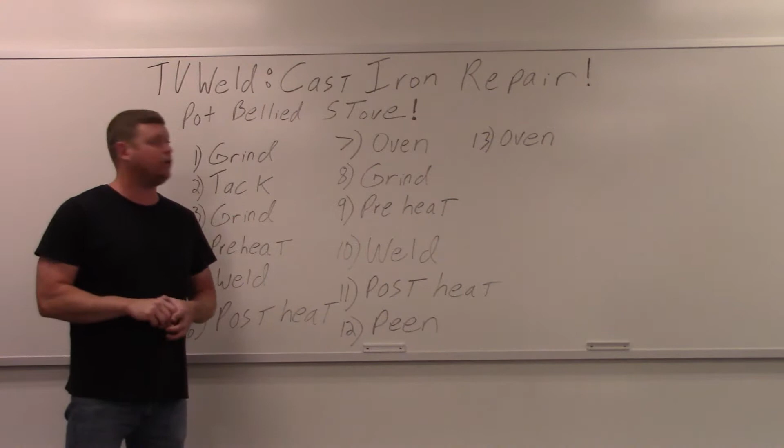One of the legs that hold up the stove is broke, so we're gonna do a cast iron repair on that. Before the steps we're gonna take, first I'd just like to say that we're gonna use a nickel rod. You always use a nickel rod when you weld cast iron. It's 99% nickel, the stuff we're using. And I'll get a shot of the box before we actually start doing the repair so you can see exactly what we're using.

This is the procedure that we're going to do. Now when you're doing cast iron, it gets chaotic when it starts because you can't stop, or else you can potentially crack the weld or crack on the toe of the weld if it cools too quickly. So I'm going to kind of outlay this right here. The steps: we're going to grind, tack, grind the other side, preheat, weld, post heat, then we're going to put it in an oven and let the entire part get to 250 degrees. If you don't have an oven, you can bury it in sand. That's a common technique used to slowly cool the material.

Then we're going to grind again, preheat again, weld again, post heat again, and then peen it till it's getting down to around, I don't know, 300, 250 degrees ish. And then we're going to pop it back in the oven overnight and just let it slow cool, all right?

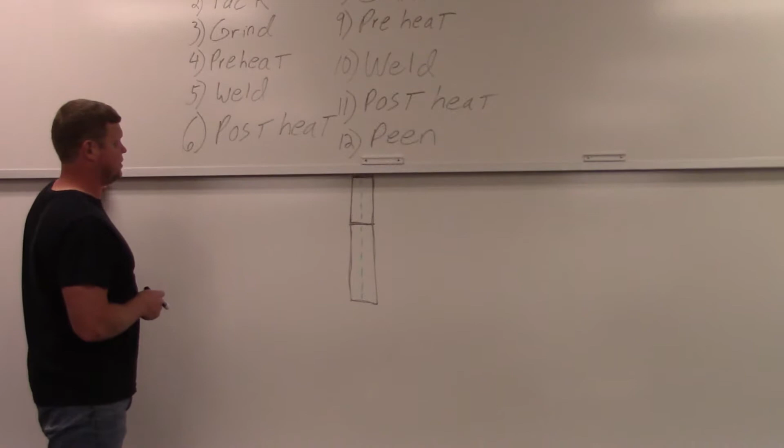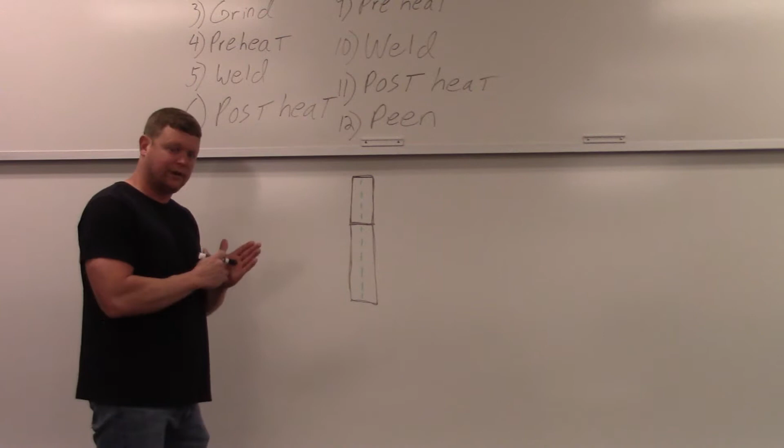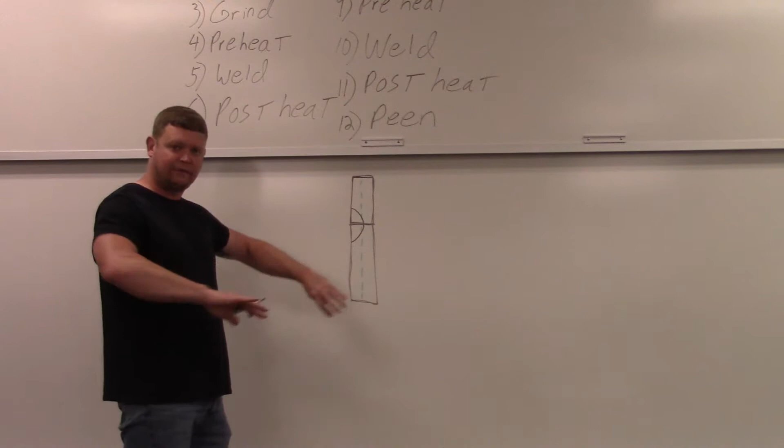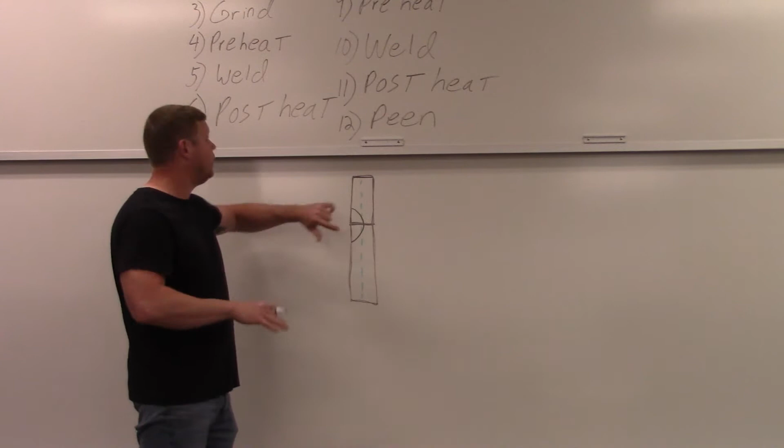After the second grind, we're going to preheat away from the actual weld zone so that the heat can travel through real nice and it's not localized heating, because that'll cause your cracking. Then we're going to weld this. Then we're going to post heat, again letting that heat get all through the whole part. We throw it in the oven, and then we're going to come back and grind again, like I said, more than 50% on this side.

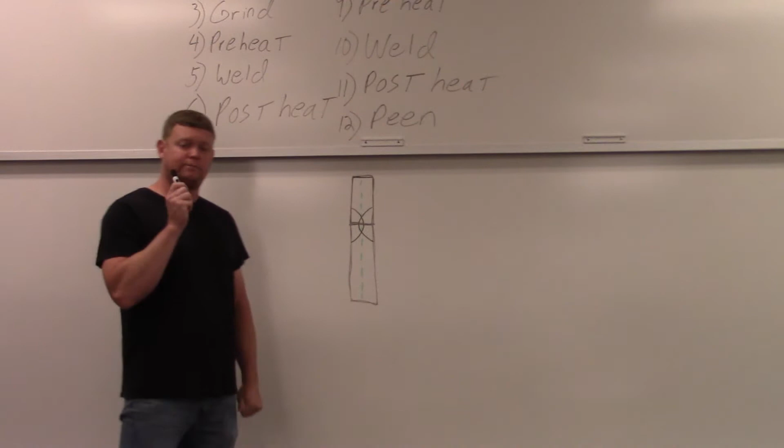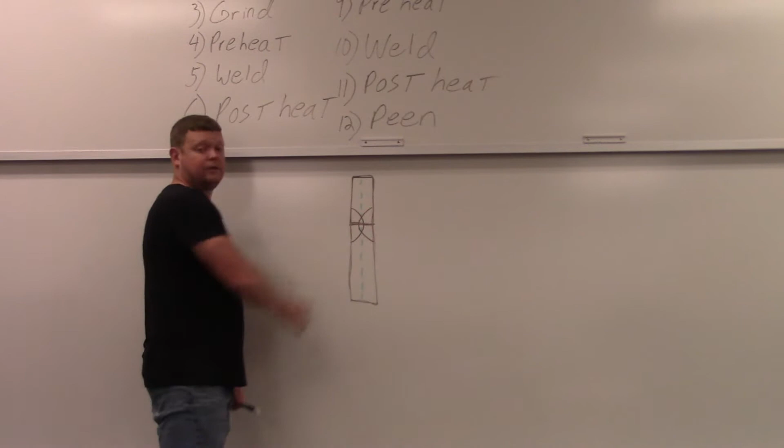So after we grind, we're going to preheat again. We're going to weld it, post heat, peen. So we're going to sit there with a ball peen hammer and just repeatedly hit it. It stress relieves the actual part. And then we're going to put it in the oven overnight. So basically you want the weld to go all the way through this part. That's the goal at the end of the day. So hopefully that'll make sense.

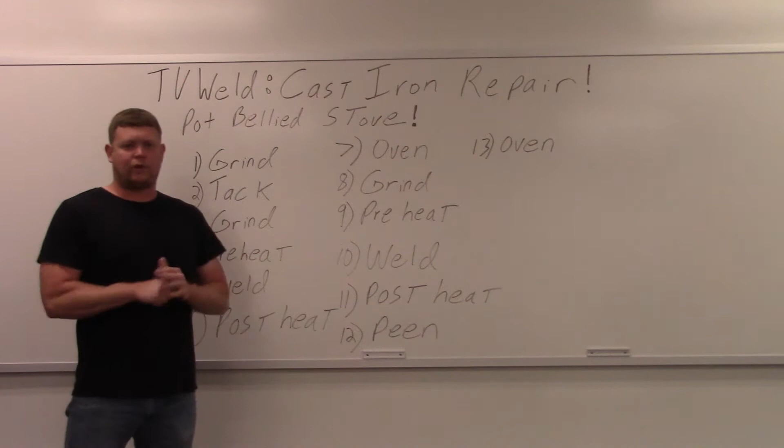I know cast iron videos are tough because it's just go, go, go. But what we'll do now is go out and look at the actual rod that we're going to use. Then we'll get into fixing this pot-bellied stove.

So this is the box of rod we're going to use, made by Harris. You can see it's 3/32 of an inch in diameter by 12 inches long, 10 pounds. There's the specification on it, A5.15. It's usually pretty expensive because it is nickel. But that's a shot of the box, gives you all the information.

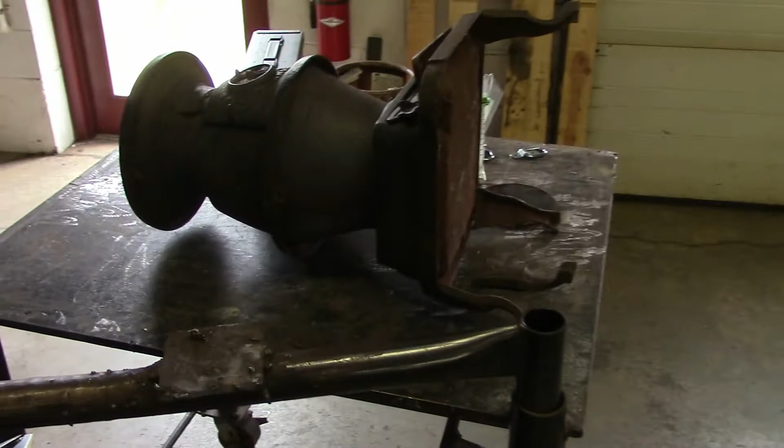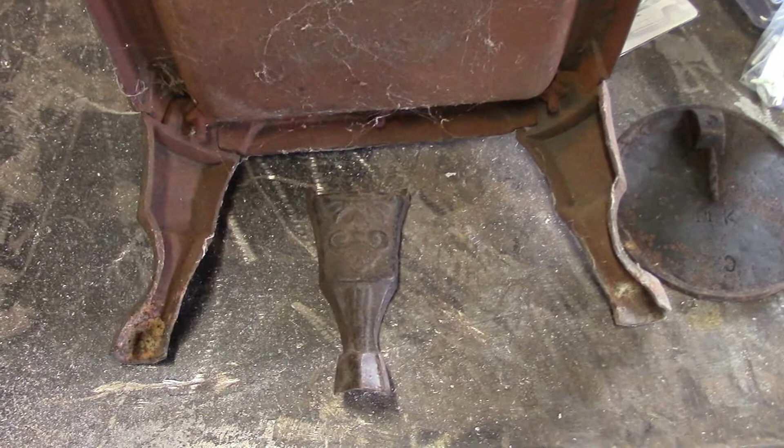Moving on. So what we got here is an old, I think they're called pot-belly stoves. It was in my parents' living room forever, and the leg was always broke. And I found it in the basement. There's the leg. And I grew up to be a welder, so I'm going to fix it now many, many years later.

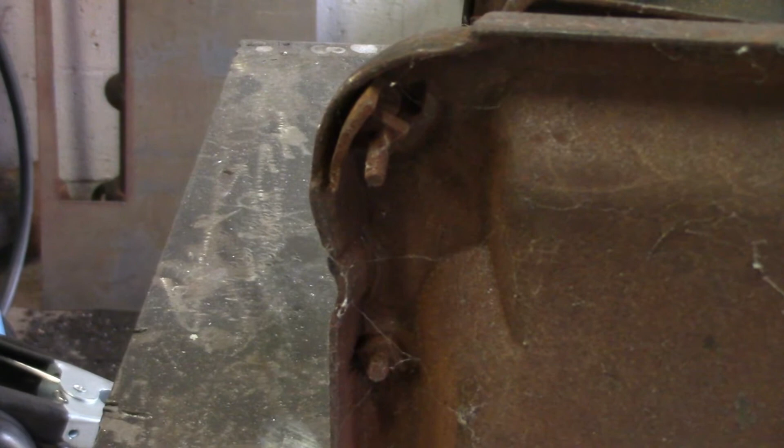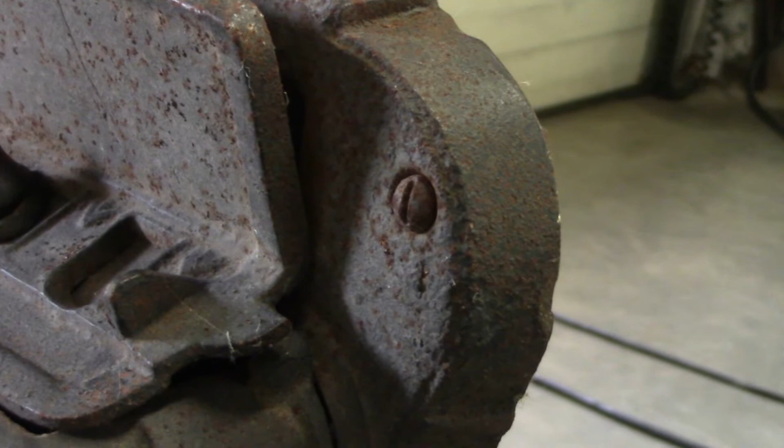And to get this off, if you look close, there's a square nut right there holding the broke piece on. And on the other side, it's just a simple flathead straight screwdriver, if you can see that. So I'm going to heat that nut up to the point where it's almost melted, and then run around the other side and try and zip it out with a cordless drill. So let's see what happens here.

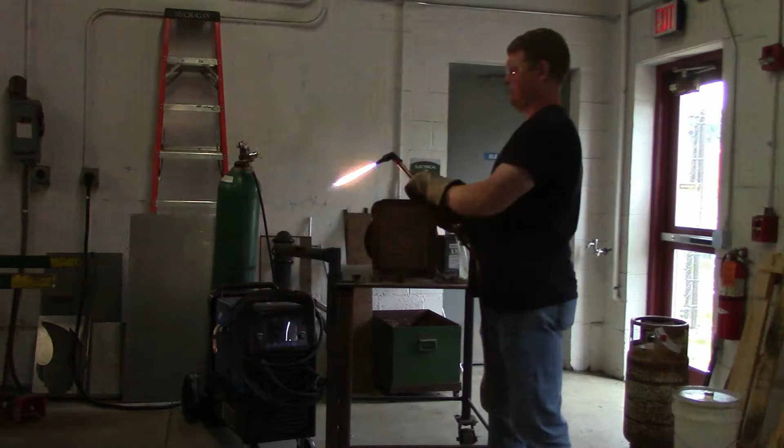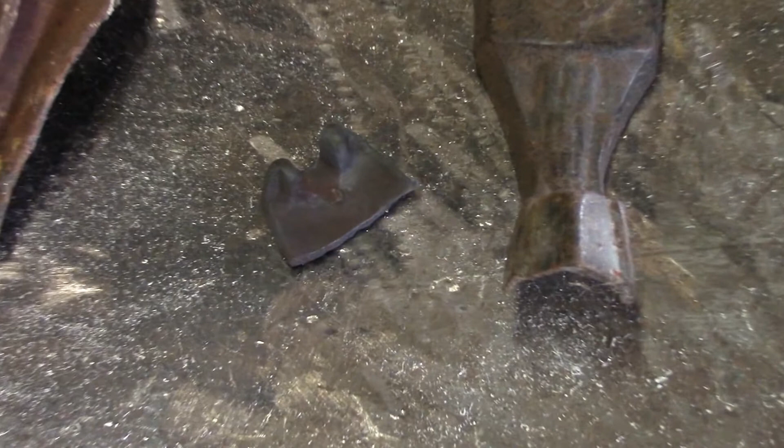So we got the part out. It's this little piece right here. I'm going to finish taking the screw out so I can clean it up and make it real nice and let that cool. I'm sure it's hot, so I'm going to take that screw out, let that cool, and then we'll get started on this.

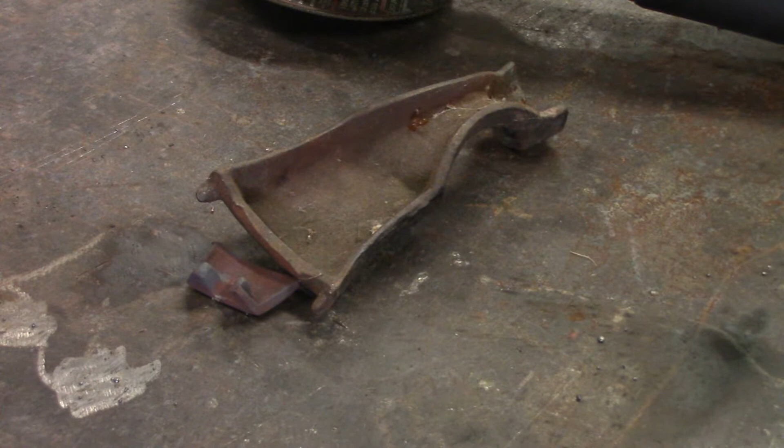Alright, so we're about to get started on this repair. You can see there's a nice clean break right there, and I'm going to have to hold this with my one hand right here while I tack it. So once you start a cast iron repair, it's very difficult to just stop and explain things, because if it cools too fast, it'll crack. So I'm just going to give you a play-by-play of what I'm going to do right now, and then you're just going to have to watch me do it from a little bit back.

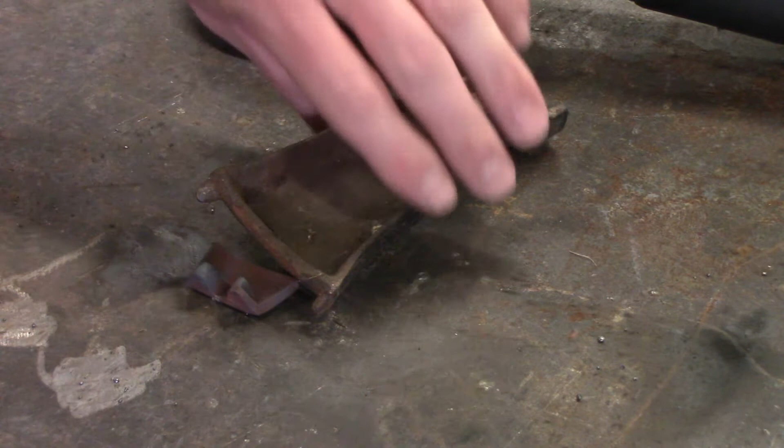So what we're going to do is I'll hit this with a grinder, and I'll tack it 3 places. Then I'm going to flip it over, grind halfway through right here, and right before I weld, I'm going to hit it with a torch to preheat it. Then I'm going to weld the backside. Then I'll hit it with a torch again. I'll throw it in the oven, which is 250 degrees, so it doesn't cool too quickly.

I'll bring it back out, grind it again. I'll try and explain what I'm going to do at that point. Then I'll grind out this side about halfway through again, and then we'll weld it again, and then we'll throw it in the rod oven, 250 degrees, and allow it to slow cool for about an hour. And then I'm going to bring it out and grind this off flush, because the other side has to fit up nice and tight on that stove.

So right now we're going to start by grinding it, tacking it, preheating it, grinding the other side, welding it. Then we'll take a pause, and then we'll grind it again on the opposite side, and then weld that side, if that all makes sense, hopefully.

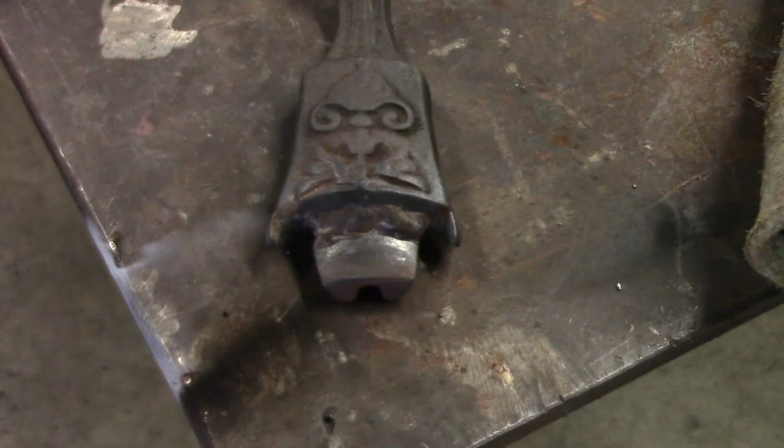All right, I just welded this front side. I got to hurry up here. I put it in the rod oven. One thing I forgot to mention is after I get done welding this, you're going to see me peen this, repeatedly hit it with a ball peen hammer to try and do some stress relief. I don't know if I mentioned this earlier, but I'm using a 99% nickel rod, 3/32 diameter, and running it at 65 amps.

So I'm going to flip this over, hit it with some preheat so it doesn't crack, grind out the back side more than halfway through, weld the other side. Things you want to look for are heat treatments, peening, fast movements, getting this thing done. So I'm going to do all that, then I'll throw it in the rod oven again overnight is what I'm thinking, 250 degrees. And at the end of this, I'm going to peen this, so keep an eye out for that.

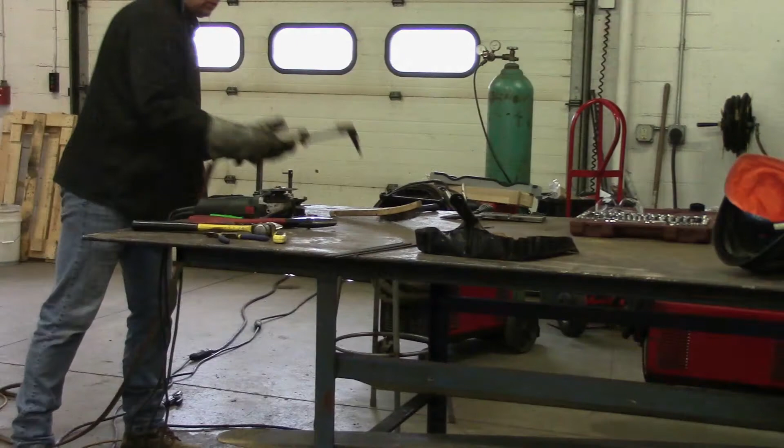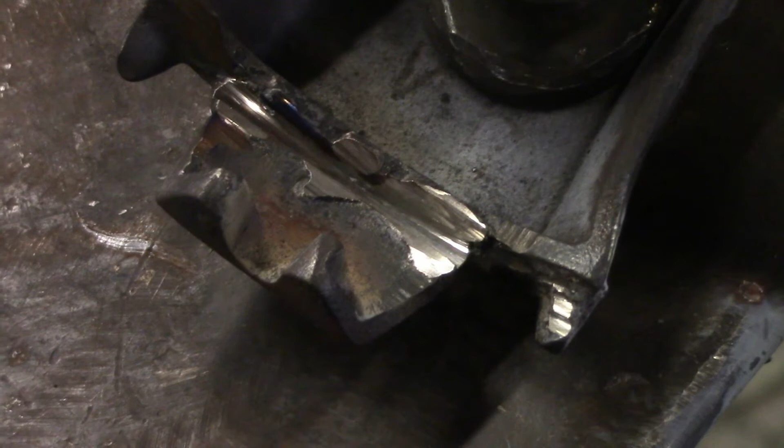All right, this gives you a look at what I just did. You can see I trenched that. Don't got much time here, but we got to weld it here and get it back into that oven.

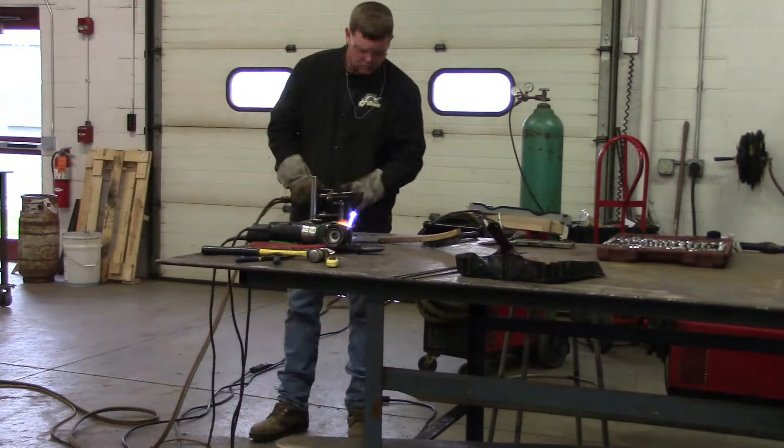So I just took this part out of the oven. It's still 250 degrees. That's what side A looks like. It's gonna have to be ground down. That's the next thing I'm gonna do. Side B looks pretty good. No cracking overnight. So now what I'm gonna do is grind this down with a hard stone, then I'll probably hit it with a flapper disc just to dress it up a little bit, and we will reinstall this. Onward and upward.

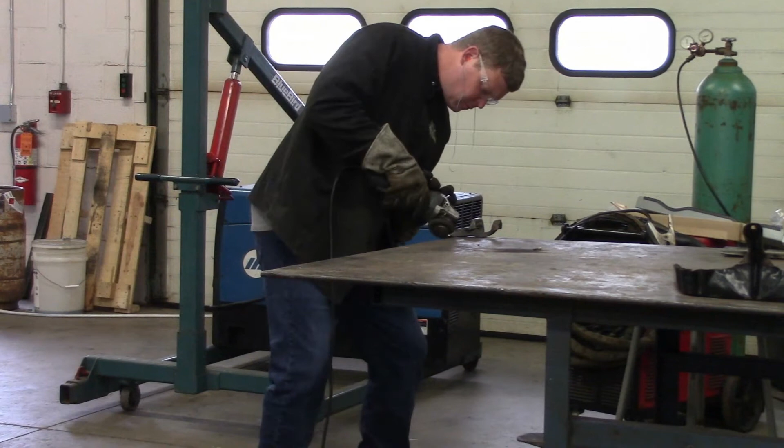Okay, just got done grinding this. Came out pretty good. So all we gotta do now is install it back on the potbelly stove, and we're done with this job. So to the install.